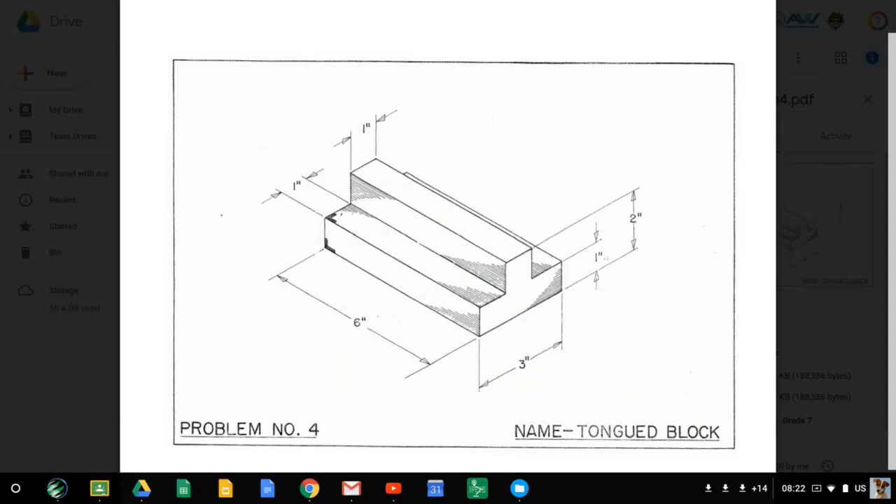Problem 4 is the tongued block. If you've ever seen hardwood flooring, you have what's called tongue and groove, so the tongue fits into the groove. This is what we're going to be making - there's the tongue. Problem number 5 is actually the negative of this, so it's the groove. If we put them together, it would fit on each side. You can kind of imagine this reversed.

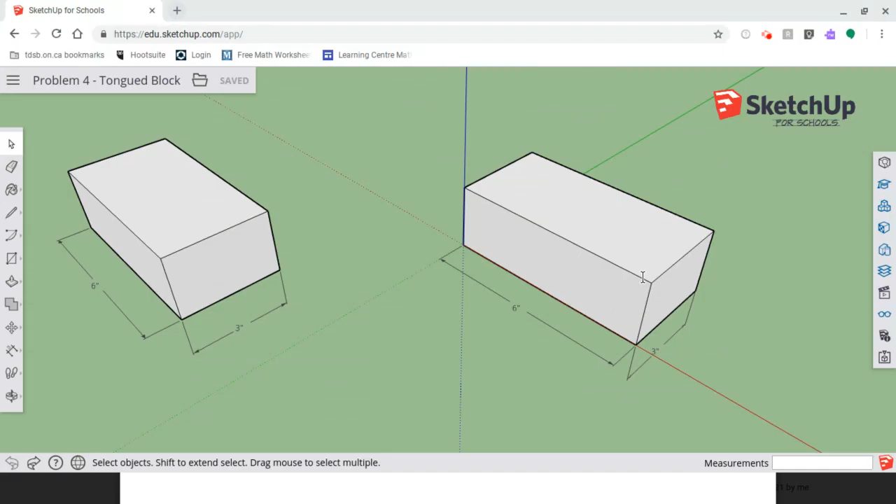It's 1 inch over, 1 inch up, then 1 inch down, and 1 inch over again. You can see that it's just an upside down T. So to do this, we'll start same as we did with our tape measure previously.

I'm going to go 1 inch in from each side, or you could do 2 inches in from the second side if you're doing the math in your head. I could do a rectangle like we did last problem number 3, but I'm going to instead do a line. Of course, line starts with L, so we will draw a line here, and I will draw a second line here.

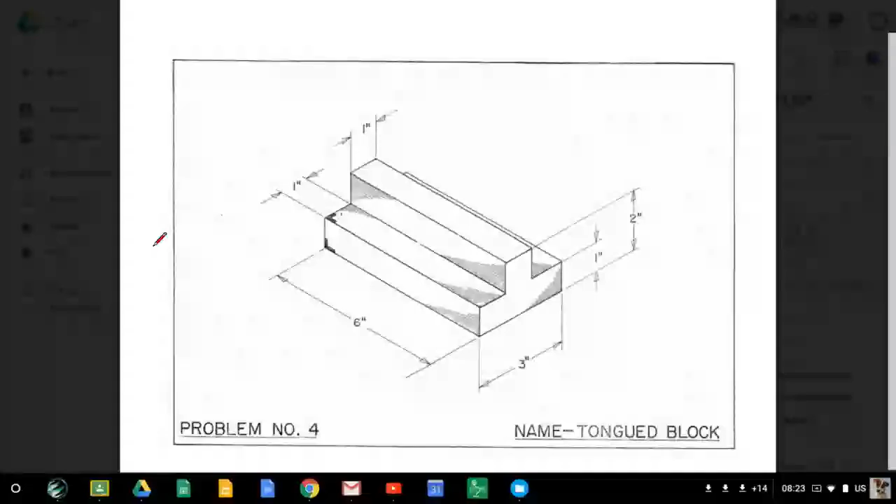Then we're going to push these down, and we know that it's 1 inch down. So I'm going to say P for push, hit enter, 1, enter, click, move down, hit 1, hit enter. And that is the finished shape.

Oh, I did forget to erase my guidelines, so let's do that - erase, and of course E is eraser. So that's the finished shape. Of course, I didn't add the dimension lines, which you will do on your project. You can see there's a bunch here. I won't do them for you right now.

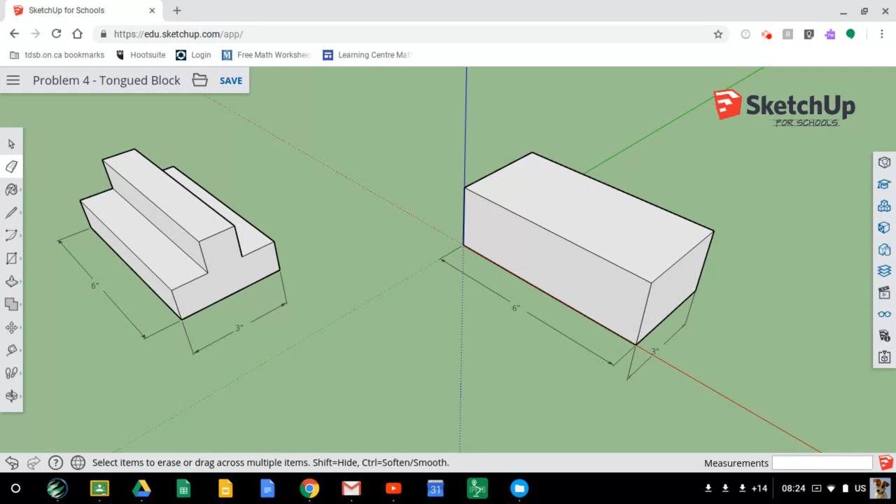I want to show you another way that you could make this tongued block. So let's zoom back here - got the people's feet here and orbit over. It's kind of the nondescript, faceless person. If you try to orbit around, the person's always facing front, so it's a 2D person. It's kind of a little funny. Anyways, let's take a look.

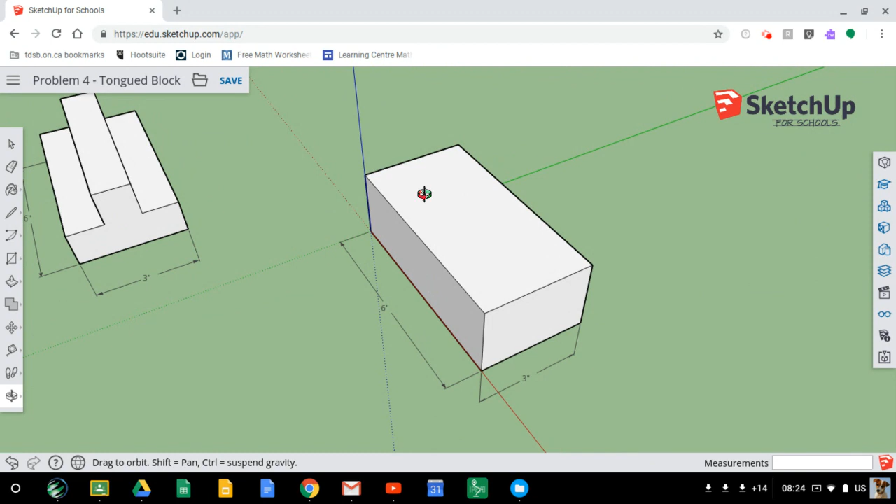Before we worked from the top, we could also work from an end and push-pull from an end. So you try this and decide which way you think is more efficient.

So I'm going to use my tape measure tool. I know that it is down 1 inch, and I know that I have 1 inch over from each side.

And now I can use my line tool on this side. Now watch what happens when I click here - you'll see I still have the line tool. Over here, I didn't have the line tool extending because it knew I was completing a rectangle. But here, because I'm in the middle of a surface, the program is anticipating that I'm going to do exactly what I'm going to do. So now notice that the line disappears.

Let's do a rectangle on the other side, just so we remember how to do that. R for rectangle - notice it's switching which face, so this is blue and this is red. I want to make sure I'm on the red face this time - this will be green if I did it over here. So I click on an intersection, click on the other intersection, and I now have both of my end rectangles.

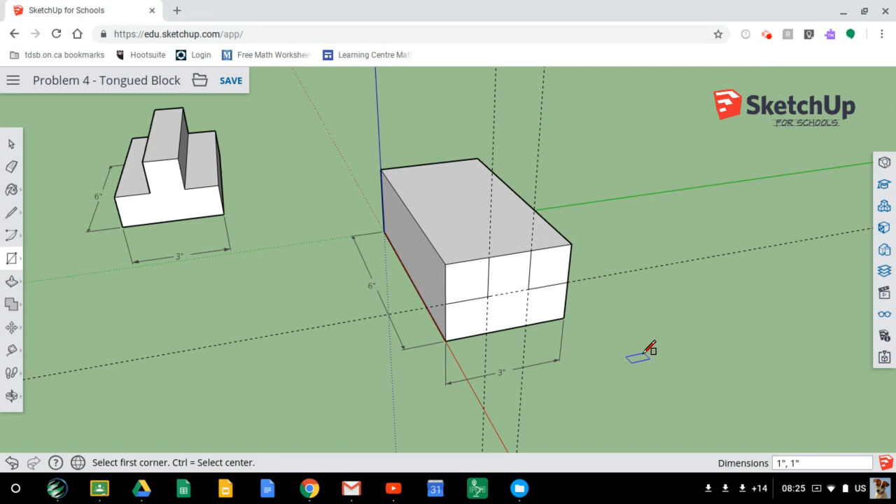I'll erase my guidelines, and now I can push this down to the end, and push this down to the end. So there's my two methods.

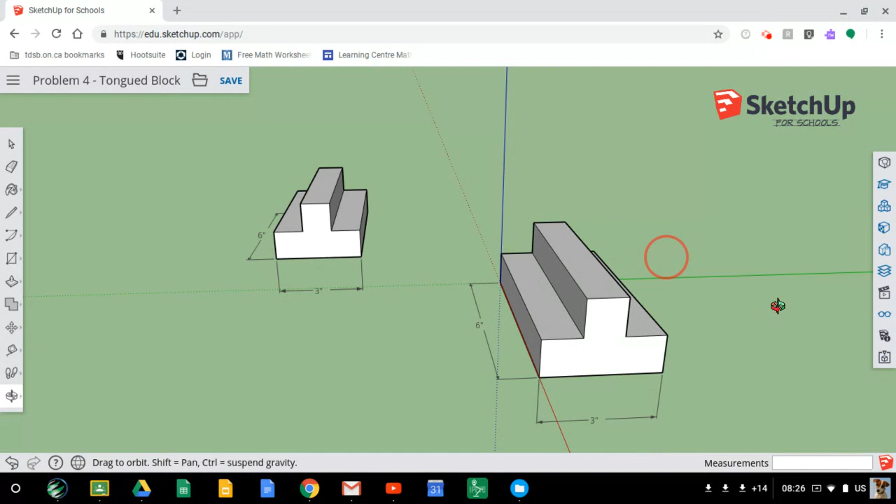You can see they both ended up with the same thing, but sometimes one way is more efficient than another, and I kind of think that working from the top in this instance was more efficient than working from the end, because I had to do a few more sets of lines. I had to do 2 lines here and 1 rectangle, and then I actually had to do 3 guidelines instead of 2 here. So it is possible, it is a way to solve the problem, but you want to think as you're working what is going to be the most efficient way to solve the problem.